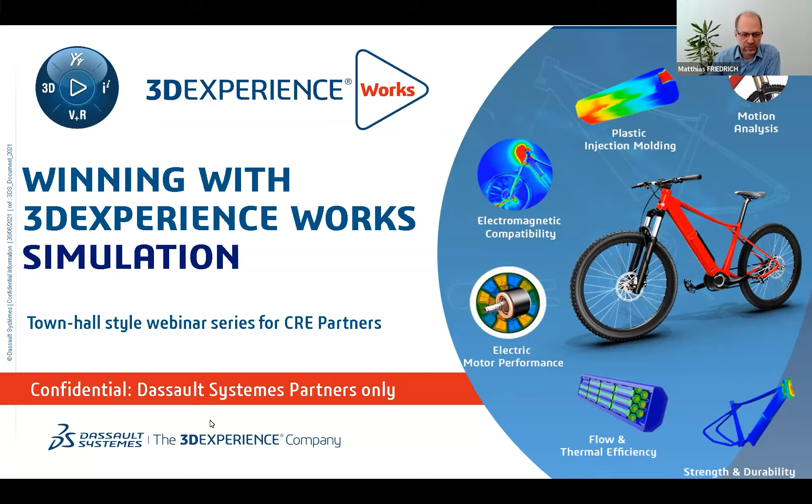This is a series where we cover all the different domains in the 3DEXPERIENCE Works Simulation portfolio. We have all the structural roles, some durability stuff, fluid dynamics, plastic injection, and today we'll focus on the EMAG role. A total of 10 sessions this year. We started in April, today we're in August, so this is our second August session. Each session takes 90 minutes.

The key benefits are you discover and learn how to close sales opportunities. It's for you to get more familiar with what we have in the 3DEXPERIENCE Works Simulation portfolio, how to position it, and how to show the benefits of these roles for our SOLIDWORKS customers. We also have hands-on sessions where you get best practices and tips and tricks delivered by our SIMULIA experts. You learn about win stories and guidance on product positioning for the different roles, so you learn how to position the EMAG role, structural roles, etc.

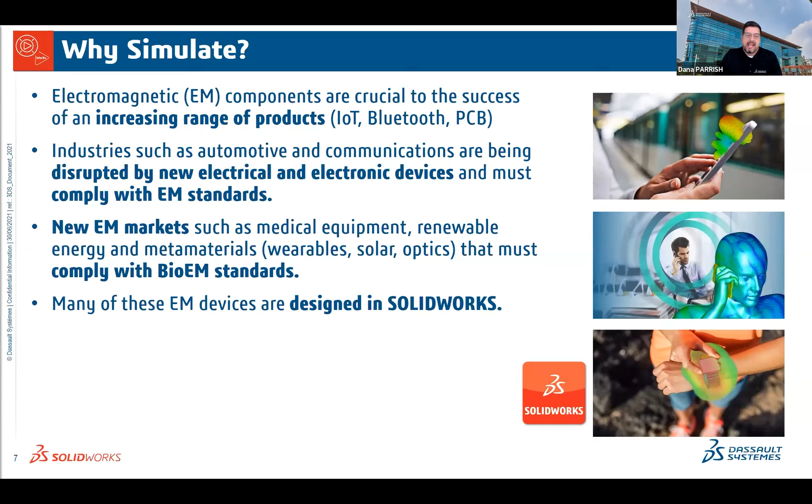Let me give you a great example of why to simulate. I don't know if you guys remember something called antenna gate. So about 2010, iPhone 4 comes out. You know, all the hoopla, right? It's an Apple product. We know every year that there's a big pomp and circumstance about it.

It didn't work. So what happened was they had to spend $175 million on replacement parts, taking the phone back, getting it fixed. It was a very bad PR move, right? Apple people are passionate about the product, and if they're passionate about it in a good way, they can be passionate about it in a bad way. $175 million that it cost Apple to fix this problem moving forward.

They didn't have any tools like that, guess what they have now? They are using electromagnetics tools, and specifically ours. Okay, why simulate here? Let's look at the actual testing.

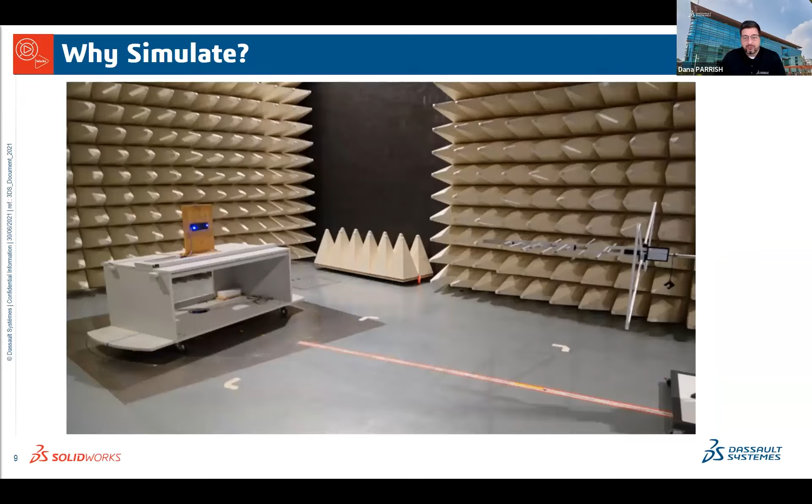This is a room where you can test electromagnetic compatibility interference. It's a very quiet room, fancy room. 50% of products that go through this lab test fail to meet the electromagnetic compatibility, or EMC, requirement. Okay, you can't launch a product unless it passes this test.

Compatibility means, where's the signal going? Are you irradiating people? Is it a nice even signal? Is it going to work?

The average test can exceed $50,000. I know that for a fact. I've talked to several of my customers that do this type of testing, and they say it can be up to $50,000. Plus, they'll put this in the room for a week, and it has to sit there for a week while it's gathering all the data.

$50,000 a test. Okay, so this is never going to go away. This type of testing will never ever go away. But gosh, if you can eliminate 3 or 4 tests, that's $200,000 you save because you're using electromagnetics to understand its performance ahead of time.

Go ahead, Peter. We have to listen, right? How do you listen to this? What are you listening for when you talk to customers?

You have to look, if they start talking about antennas or any type of electrical motors, they're doing MRI. If they're a medical company, maybe there's some sort of scanner, signals, 5G measurements, right? The anechoic chamber, I think that's what it's called, right? Emissions, PCB design. Okay, when you start hearing this stuff, that's what you need to listen for. And that's where you know that at least you can bring up the conversation of our electromagnetics tool and what it can do for the customer.

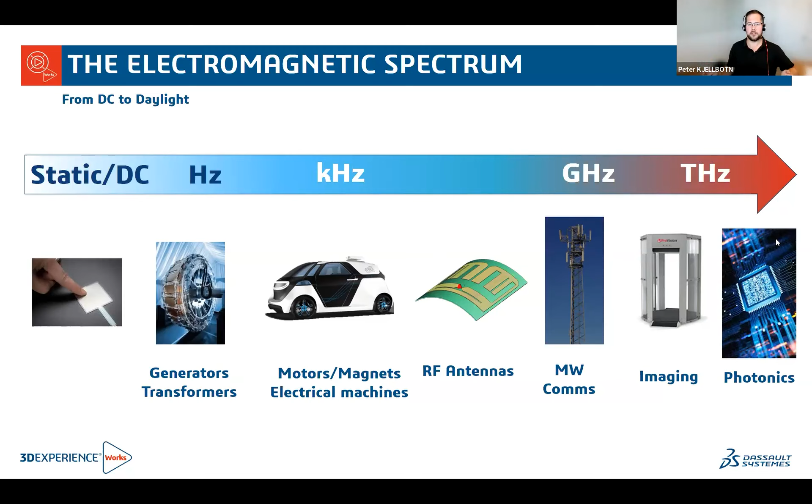So that's the spectrum we're talking about simulating, and there's obviously a huge amount of entirely different use cases in that spectrum. And that's where CST Studio Suite and Electromagnetics Engineer come in. And for those of you that aren't familiar, you'll hear me refer to both of these almost interchangeably, but we'll really talk about the difference between them.

So what Electromagnetics Engineer is, that is our offer on the platform. That's the role. And what it actually installs is CST Studio Suite. And CST Studio Suite is the actual electromagnetics engine behind the role. And what this basically does, Electromagnetics Engineer, is it will locally install a copy of CST on your computer. You launch that from the platform, similar to 3DEXPERIENCE SOLIDWORKS, where you log in, click on your compass, launch the tool.

But it's not just CST with a cloud connector on it. That is a big part of it, but there's a lot more to what the cloud offer brings, and I'm hopefully going to show you guys a little bit more about that, so you're really familiar about what CST brings to the table and what the platform tool Electromagnetics Engineer brings to the table.

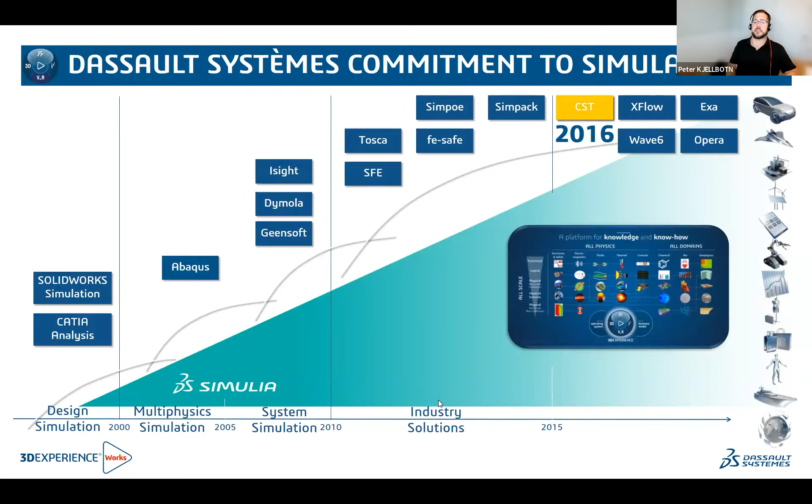So we know Dassault has picked up a lot of simulation products over the last couple of decades, part of the long-term commitment to all physics, all scale simulation, and CST was one of those. You'll see it towards the right of the slide. CST was actually acquired by Dassault in 2016, and it's since been integrated into the 3DEXPERIENCE platform, but it's not new. CST has been around for more than 20 years and is one of the industry leaders in electromagnetic simulation. So it's not a brand new product, it's a very mature, very stable product with a lot of existing users.

In electronics, that's another really big space. We'll talk about this more when we get into key industries, but anybody with a circuit board inside their design needs some sort of electromagnetics analysis, whether that is analyzing the actual communication signals, the 0 and 1 bits going through the board, or analyzing the power requirements of that board, all the power delivery networks in there, as well as running what we call signal integrity and power integrity analyses, figuring out how clean those signals are. Then we can get into emissions of those boards.

Any piece of electronics has to meet emissions regulations, and that's both for basically interference it could cause, as well as susceptibility or radiation it must accept. So that's like, if I had a cell phone and I took it and walked into my living room and suddenly my TV and my radio all went staticky and crazy, that wouldn't be acceptable. That's why every piece of electronics has to meet emissions standards.

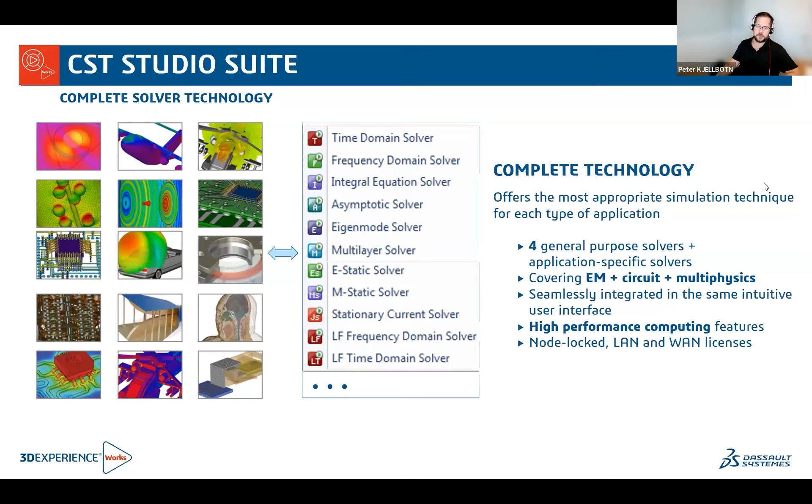Now, as an example of that, one of these would be a horn antenna, similar to a satellite antenna some of you guys may have mounted on your house or used to have mounted on your house. I may use 2 different solvers to solve this. I might use a full wave solver, like our time domain solver, to solve the actual antenna, the feed horn itself, but that wouldn't be well suited to actually solving the reflector dish, which is part of this whole system. So I might actually use a hybrid simulation where I use one solver to simulate the horn, and another solver, the integral solver in this case, to simulate the dish, and I can run these at the same time. They can trade information back and forth and run an accurate simulation.

There are also ways to do what we call equivalent near field sources, similar to transferred boundary conditions in a mechanical or fluid study. That's where we might use one of those full wave solvers to look at actual antenna performance. Then, if we're trying to put this into a much larger platform, we can imagine drawing a cube around that antenna and capturing the field it's radiating onto that cube. We can then drop that into a much larger model and use that equivalent near field source to drive the simulation on a larger structure. We'll talk more about that as we go on.

I'll actually show you an example of this type of analysis on the e-bike.

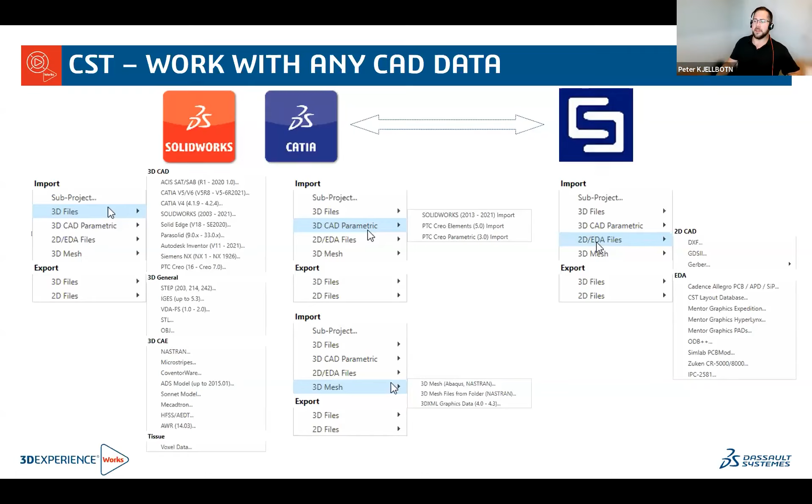You'll see on the list here, underneath the SolidWorks icon, we can handle SolidWorks, CATIA, Solid Edge, Inventor, NX, Creo, etc. We can bring in just about any mechanical CAD data. On the electrical side, we can bring in board designs from just about any standard board design software - Cadence Allegro, Altium, Mentor Graphics, Zuken, as well as the ODB++ neutral format. Regardless of what the customer has, even if they're not working with SolidWorks, we can handle the CAD data they're using. That's what CST brings to the table.

None of that is really exclusive to the platform. So what does the platform bring to the Electromagnetics Engineer? To start with, easy access to all of your CAD data - bringing it in directly from SolidWorks, storing it in a single place, a single source of truth, etc. And then all of the standard cloud benefits we're familiar with from other simulation tools.

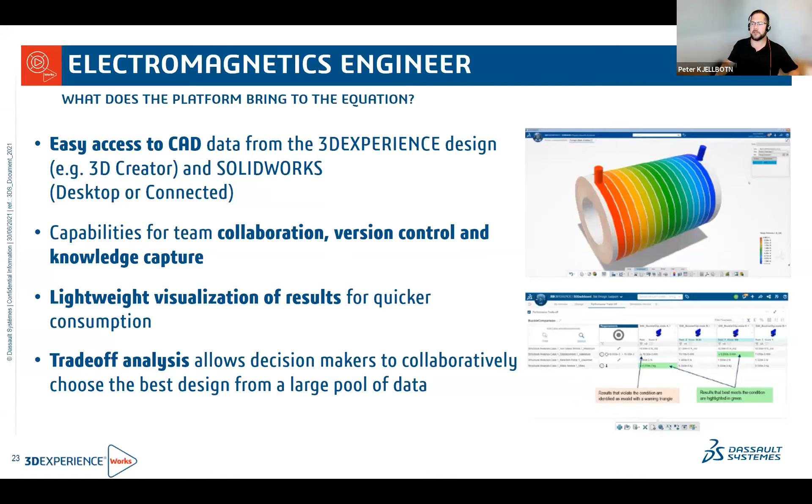We can save lightweight results to the platform. You can view those in Physics Simulation Review. We have cloud solving as well that we'll talk about in a moment. We also have the trade-off analysis app, which you'll see used in a motor video - I'll show you guys a little bit later. That's where we can go in and do multiple studies, assign KPIs and rank them, letting the platform help us look through very complex data to figure out, based on our KPIs and how important they are, what the best design decision or design choice is.

Now, for me, the most important thing the cloud brings to the table is cloud solving capability. This is common to all of the platform simulation tools, but we have some pretty compelling things that are different with Electromagnetics Engineer. To start with, we have 16 core cloud solving out of the box, which is much more than I have available on my laptop. I can solve on 16 cores all day long, no additional charge.

If I do need additional computing power above 16 cores, that's where credits and tokens come in. We have all the standard compute configurations you can get in the fluids or structures roles, up to 144 cores. But then we have some differentiators. When we get into Electromagnetics Engineer, we can run with up to 288 cores, or use coupled CPU-GPU solving. GPUs handle parallel calculations very well and are well suited to some of the electromagnetics challenges we have. Some configurations let us solve with 24 cores and 4 GPUs, or 48 cores and 8 GPUs concurrently. This can take really long simulation times and make them very manageable, or if you're exploring a very large design space, help you move through it at a reasonable speed. I have some exciting things to talk about on that.

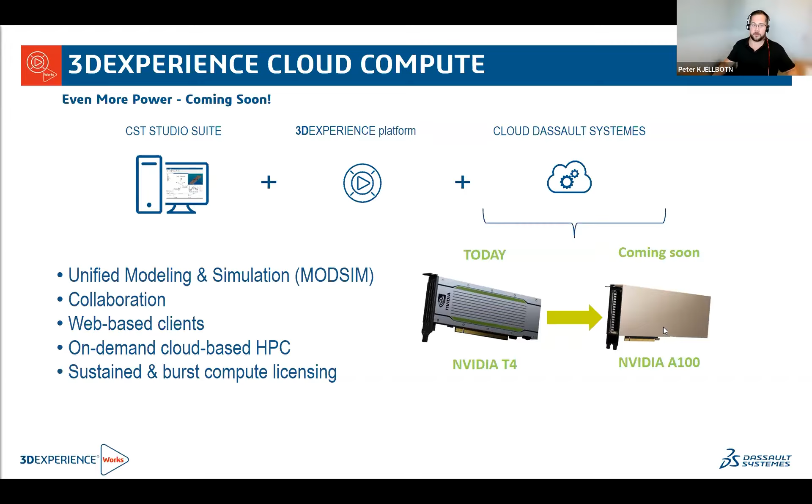What I can tell you guys, we have these brand new NVIDIA GPUs coming to the Dassault public cloud. The PO has been issued for these, so the order is in progress. Can't give you a date yet, hopefully it's this year, but we will get these in and installed. And as soon as these are in, our EMC customers are going to be able to take advantage of this. So you've seen maybe some speed up factors before where I compare these to a solve on my local laptop, and we can see like 10 times improvement when you run into GPUs.

But there's also what we call data center GPUs, and these are the newest ones. These are not designed to be put in a local workstation, they're designed to be rack mounted. And they work very, very well for performing this type of calculation. They're also used extensively in AI training as well. So let's have a look at these.

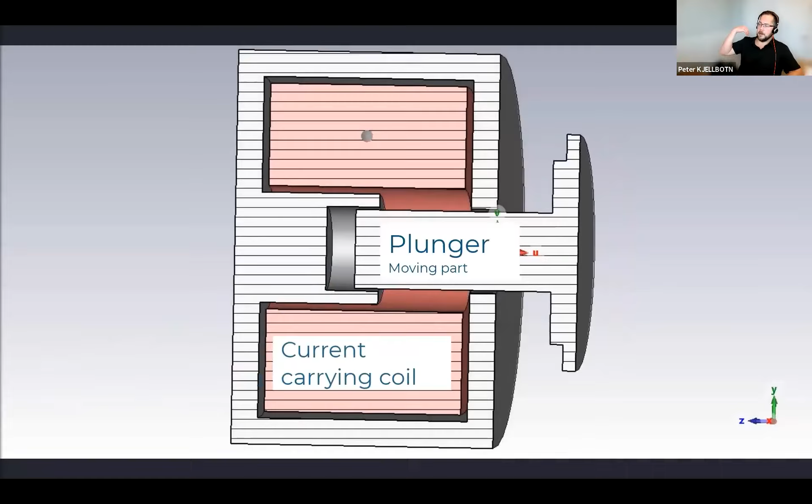Let's take a quick look at this. I've got a post on Partners Technical that runs through this, with the whole 8-minute video from Dan. This is just a highlight reel, and I'll narrate it. What we're looking at is a simple magnetic actuator here. We essentially have a plunger and a coil that's applying an electromagnetic force to move it back and forth.

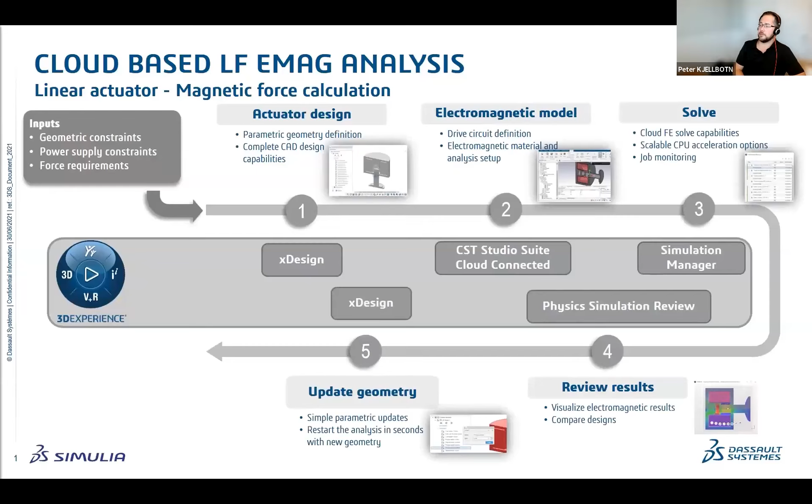What we'll do, as I mentioned, is start with XDesign for the CAD data, and do a complete parametric design there. We'll move into CST Cloud Connected to build the study, solve it with the Simulation Manager in Cloud, and then look at Physics Simulation Review to look at results. We can even go in and iterate that, doing design changes, etc.

So starting in XDesign, we can look at the entire actuator here. I've got the design, a very simple part. We basically have three parts: the housing, the coil, and the plunger. And we parameterize these so we can easily change these dimensions later on.

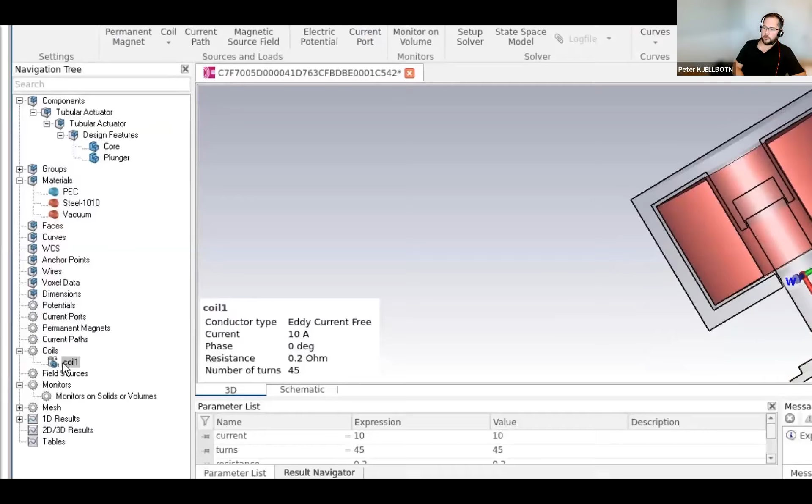Now moving into CST Studio Suite Cloud Connected, this is on a browser, we're going to open up that product and set up an entire study on it. We'll see we have the parts here, the core and the plunger, with materials assigned to all of those. We have our coil with the number of turns and the resistance defined, and we have field monitors set up as well. So from here, we've set up the study.

I can now move into Simulation Manager and actually run it. That's as simple as finding my study in Simulation Manager, clicking the Run button, and choosing which solver configuration I'd like to run with. In this case, we'll just solve this with 16 cores. It's the magnetostatic solver, so I don't believe we have any GPU acceleration there, that's why you don't see those showing.

So again, in CST Cloud Connected, we can visualize all of these results, but we don't have to load up Cloud Connected to do that. We can export those results out into Physics Simulation Review, which are lightweight versions of the results that you could very quickly show on a laptop, out at a customer shop, in a sales meeting, or even on a cell phone or tablet. So we can see the results here, and look at the forces and the magnetic field moving through the component.

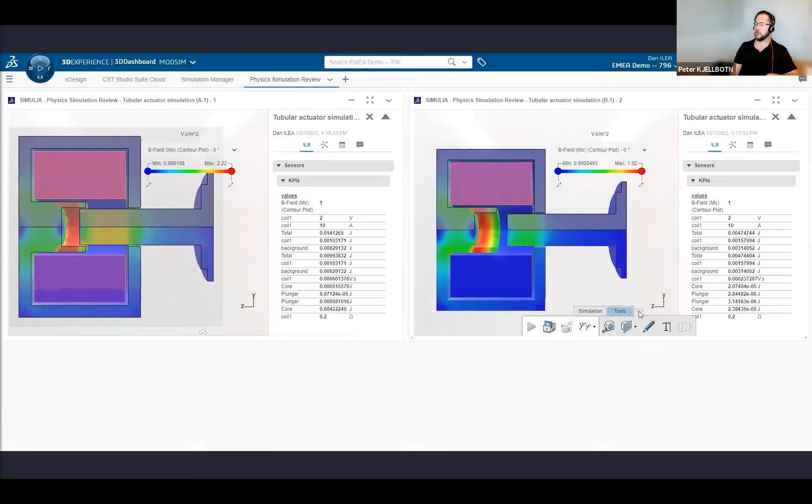And that's really an example of a workflow that went start to finish, from the concept of, hey, we want an electric actuator, right up into the full simulation of it, without ever leaving a web browser. And I think that's pretty impressive. I'm interested to see what sort of workflows our customers and our AEs start building with these, but you can do some pretty interesting things.

Now, what I'll do next is a quick session on the industry focuses for CST, and then we're going to jump into some resources that are available before I throw this over to Hassan. So without spending too much time on this, there's really three main focus areas that we have.

And I mentioned the whole big electromagnetic spectrum earlier, we can handle all of those cases. Certainly, if you see an application that's not on the screen, don't shy away from it. But if you're doing prospecting initiatives or pipeline building activity, these are where we think you're going to find the most ops. To start with, in low frequency electromagnetics, things like electric motors.

We have a really good tool set on that, I'll mention, and we'll show a video on shortly. Also things like sensor design, magnet design, and then things like the actuator design that you just saw me do.

We actually had a sale to a US customer for actuator design. This was probably a couple months ago, and the sales cycle was less than a week. We were actually dealing with an SSU op with the same customer, a structural op, and they went, oh hey, one of our electromagnetics guys wants to talk to you. And it was, hey, we need to design an actuator different than ones we've done in the past.

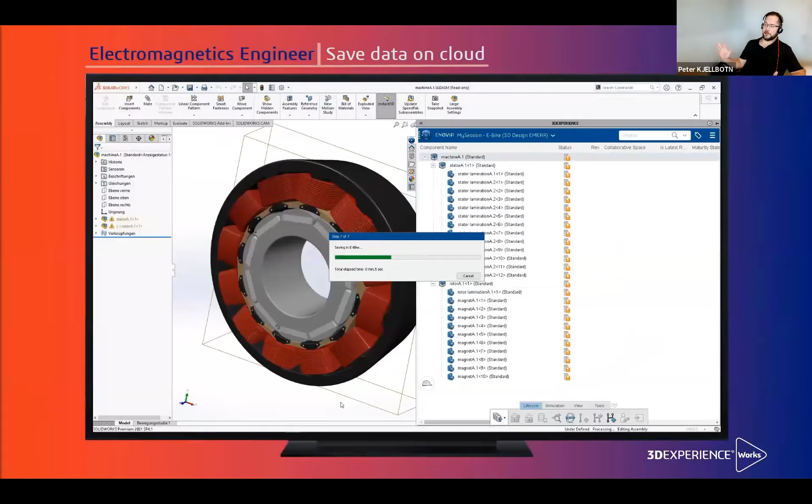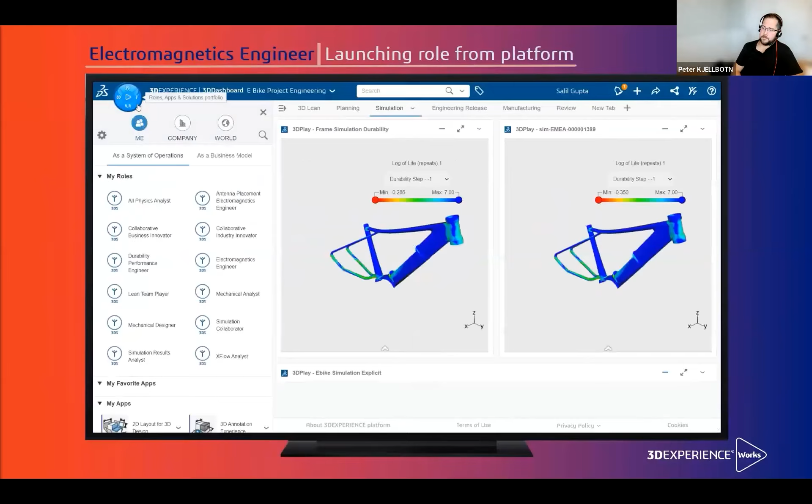Once we're here, we can bring in materials and start assigning materials for the magnets in this motor. We can define these magnets, and of course, with the power of 3D modeling here, once we have one of them defined, we can very easily pattern those around to the other ones as well.

We can go in and start defining the coil from the solid here. So I can go in, and in this case I'm parameterizing the number of turns, so I can change that or optimize that later on.

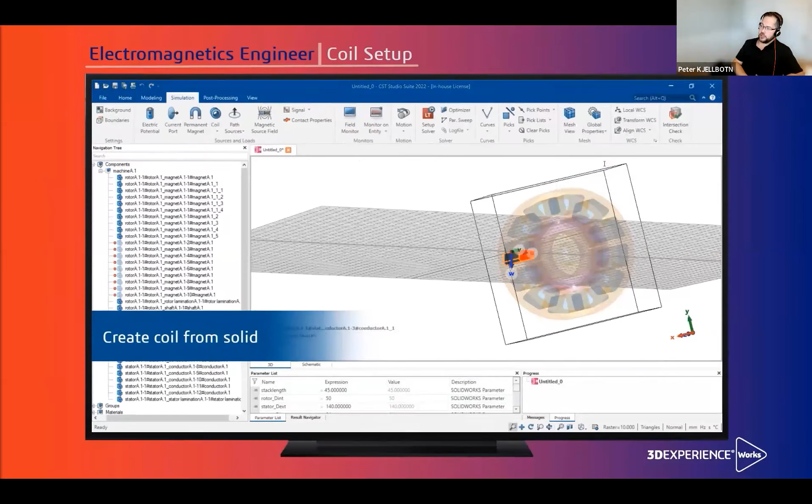In setup, this is a three-phase motor. You've got your three phases of coils there. We can define the air gap in here as well—that's the gap between the rotor and stator.

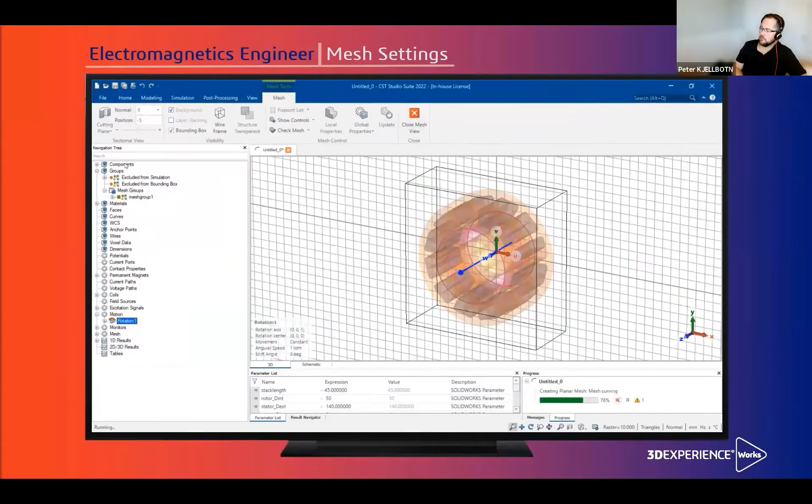Define the boundary conditions of the study, and then we can go in and mesh it. Have a look here—you'll see we're doing automatic refinement around that air gap region. You'll see a really, really fine mesh in the gap region right in there, coarser mesh otherwise, and we can now set up basically the machine task or machine simulation sequence here.

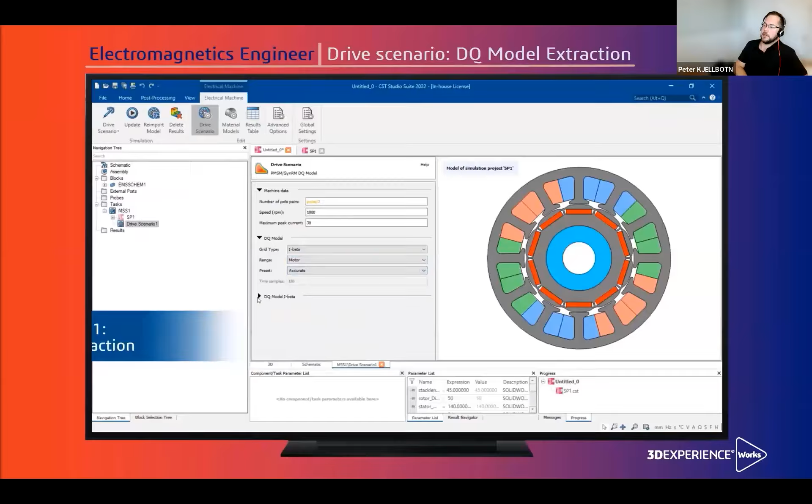We'll start defining a drive scenario, and this will pull out what we call a DQ model from this. You can see that described as a color map.

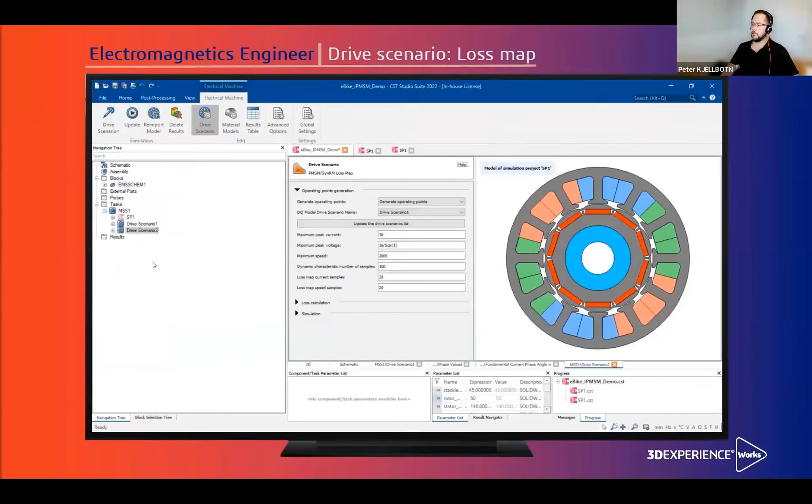Now we can start setting up dynamic characteristics for this as well. So we'll go in and define the operational limits here—maximum current, maximum voltage, maximum rotational speed on the motor—and start pulling out performance information. Things like predicted speed, efficiency curves, power curves as well.

Finally, once we set these simulations up, we can set a performance trade-off study. We're going in, we've set these three different studies here, and we're now setting and ranking KPIs.

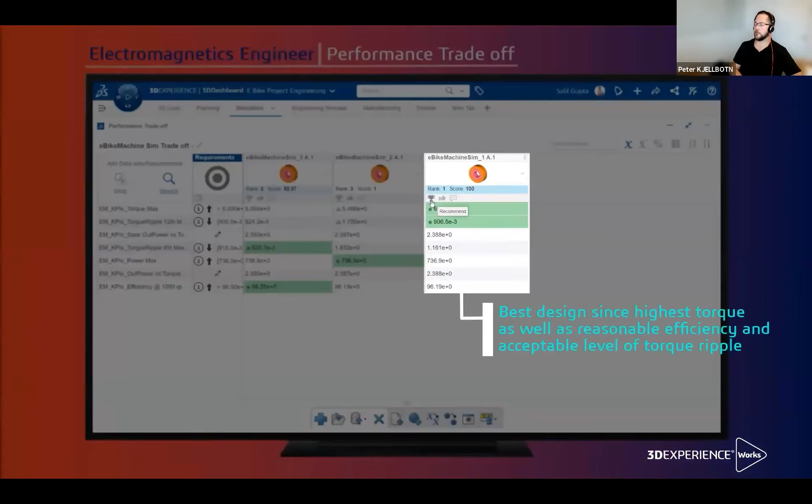Some things we might be interested in are maximum torque, the amount of torque ripple that's provided—which is how much vibration you get in the torque—as well as efficiency. So very quickly, we can go in and pick the best design based on those KPIs.

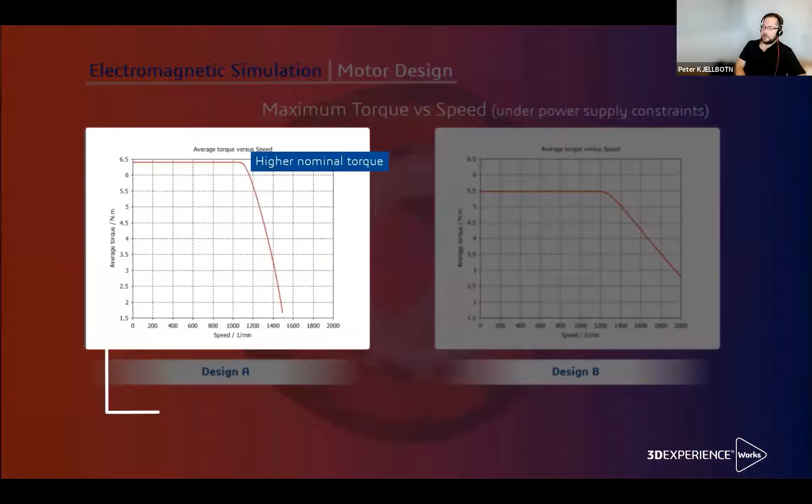So there you go—those are the three we looked at: maximum torque, torque ripple, and efficiency. Design A has a clear winner for higher nominal torque. It also has lower torque ripple, which means it will be smoother, better for the user. And finally, the efficiency is well matched to a typical riding cadence of a rider on an e-bike.

So that's a quick example of how Electromagnetics Engineer can help us look at three different designs, set those up very quickly, and pick the best one for our needs. Again, easy setup of the model and the drive scenario—you can very quickly get lots of different results out of that, and you have the power of cloud solving when you need it.

Now, with that guys, I'm going to skip over this slide on electronics just for time here. We talked about these three areas a little bit, and we're going to spend a lot more on antenna design in just a moment.

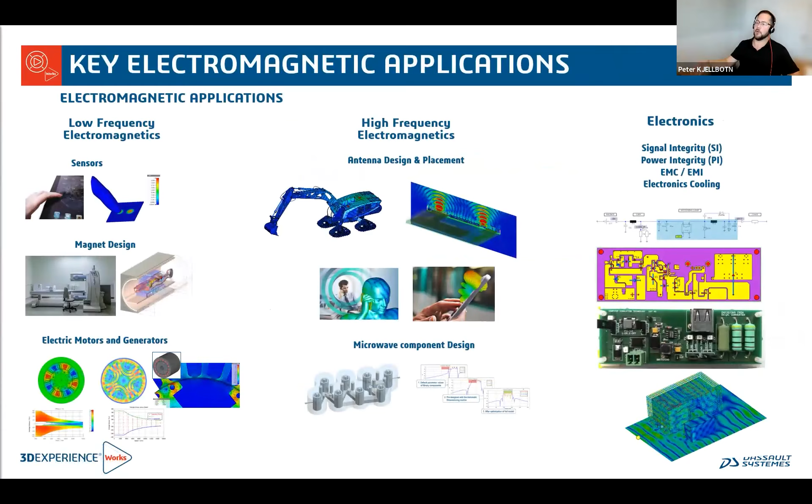Yep, we can still hear you, Peter. You're on just a roll, amazing.

Peter, you're doing great. Yeah, it's amazing just how widespread electromagnetics has gotten in the last handful of years. Everything has an antenna in it. It's wild. Well, that's like it really is.

I'm super excited about this product because it's a totally untapped market for SolidWorks. Other than a couple little partner products that didn't have a lot of capability, we haven't really played in this space before. And now we have one of the industry's best tool sets for it. So yeah, there's a lot of opportunity here, guys.

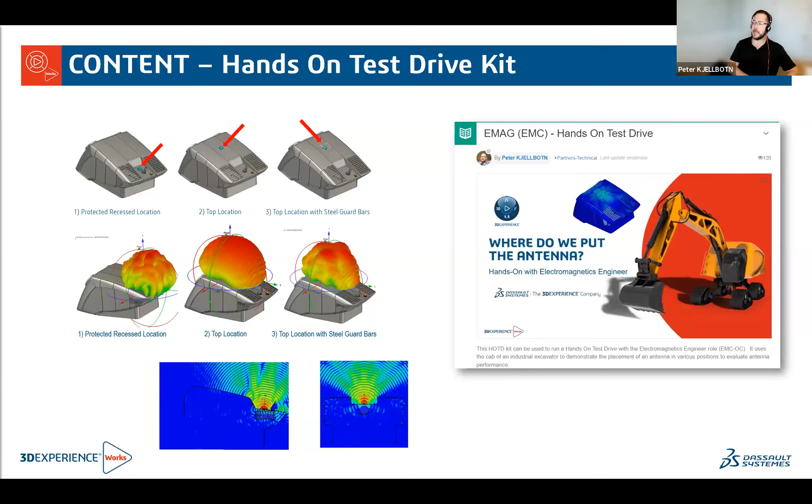So this test drive kit is a complete package that you can use to run a hands-on test drive with your customers and walk them through this exact kit. There's step-by-step guides, instructor guides, full result animations included with the data set, as well as in the instructor PowerPoint. We want to make it as easy as we can for you guys to run these test drives. And please, if you have any feedback, let me know, I'm happy to try and make this better. In fact, Hassan and I have been talking about ways we might be able to improve this and make it a little quicker to solve.

So the final thing I'll touch on here on content is tech tips. Now within the Partners Technical Wiki, if you browse from 3DEXPERIENCE Works Simulation, technical, tech tips, there's a whole EMAG section. As I mentioned, I'm really new to electromagnetics. 14 months ago I didn't know the first thing about it, and I still don't, not compared to somebody like Hassan, but I've been learning over the past year, and I've been trying to put down the stuff I've been learning in these tech tips, because if I'm hitting these challenges, probably you guys are too, as you're trying to learn this product.

So anything from tutorials on how to bring your first model into EMC, how to archive a CST project for archiving, or how to pack it up for sharing, kind of like a pack and go in SolidWorks, how to cloud solve, how to download results after cloud solving. If you solve and then try to open up on the platform, why aren't your far field plots or any of your results showing up? There's a lot of good tech tips in here, guys. And again, if there's things you'd like covered that aren't in here, that you think would be useful to have documented, please email me. I'd be happy to try and add some tips based on what you guys want.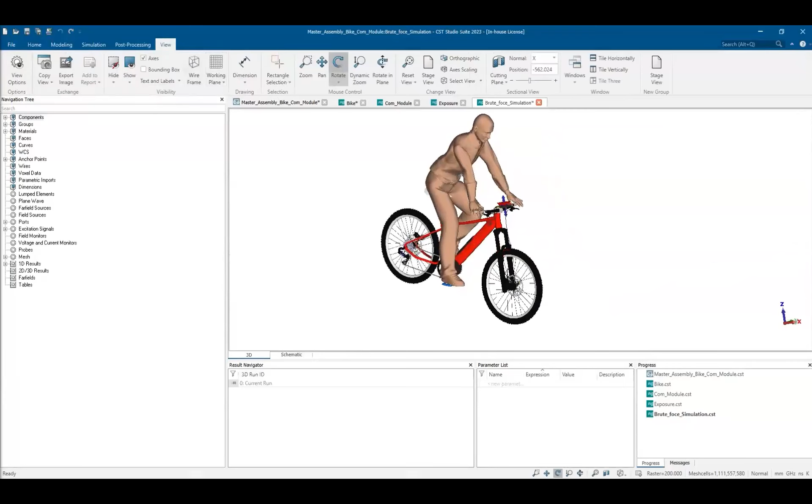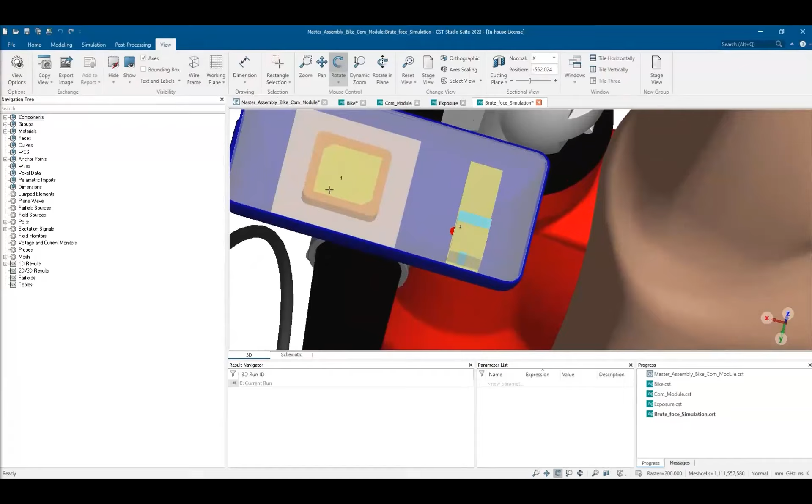You may notice that we have an electrical bike on which we have a human pedaling, and on the bike we have a communication module - a device, could be a GPS tracker or anything else. You can see we have two antennas inside: one antenna is for GPS communication, a patch with some notches - I'll tell you why we have the notches - and on the other hand we have a Bluetooth antenna, which is also found in a lot of high-tech devices.

Both antennas are based on ceramic materials, so we have a material here with high permittivity, and using material with high permittivity actually helps with reducing the sizes of the antennas.

Now, if we desire to simulate this structure to get all of it in one shot, which we call the brute force simulation, by default we have a huge amount of mesh cells - over 1 billion mesh cells. I'm not saying this is not doable, we can simulate this kind of structure, however we would need a cluster with a lot of CPUs, a lot of cores, or a workstation with a lot of GPUs inside, GPU cards with GPU memories that could handle up to 1 billion mesh cells.

Even though we could make use of our TLM solver that reduces the mesh all around the structure, we would still end up with an insane number of mesh cells needing clusters or workstations with GPUs. So my objective in this webinar is to show you how we can overcome this challenge by dividing the simulation into several sub-simulations, what we call in the domain of simulation, hybrid simulations.

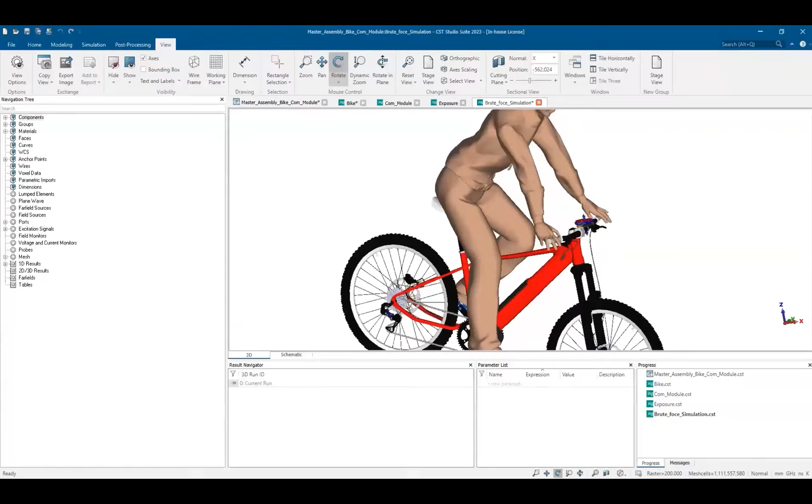Let me tell you why we have this huge number of mesh cells - we have a multi-scale problem. What we mean by multi-scale is that we have the communication module, which contains antennas with very small details, very small features, or very small dimensions with respect to the wavelength we are working on. But at the same time, we have a big scale platform like the human body we have here, or even the bike itself, considered as a huge, big domain or big platform compared to the wavelength.

In CST, we have a lot of numerical methods where each method is dedicated to one type of problem. For example, if we have antennas with small details, we may use time domain alone or frequency domain alone. Those are amazing for this kind of simulation, antennas, etc.

But when we place these antennas on a big platform, time domain or frequency domain start to be limited. For example, if I use the time domain, I can show you the mesh that we obtain - you see it's huge. We can literally not see the device until we zoom in there.

On the other hand, we do have some numerical methods mainly dedicated for big structures like the bike, which are basically surface mesh based. This is what I'm going to show you today - we call it the asymptotic solver, a ray tracing technique. I'm going to show you how we couple all the simulations together to obtain results as if we were running the simulation in one shot, as a brute force.

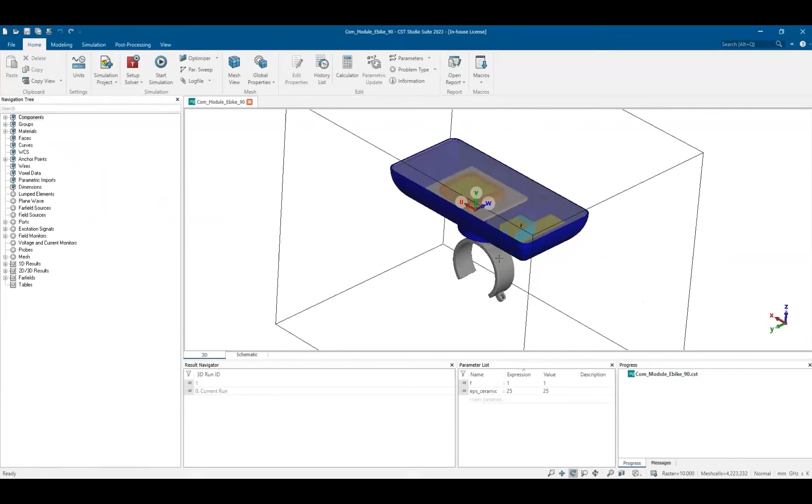But before going into that, let me open the communication module file alone to show you how the antenna operates in order to understand why we need this kind of antenna. You can see our communication module is composed of the housing, the antennas, and the hook used to fix the communication module on the bike.

So here we have the patch antenna, and you can see the patch - wait, let me just remove this glass here. So you can see that the patch is not 100% square. It is a square patch, but we have introduced some notches here.

Now why do we use this kind of patch? Because we would like to ensure a circular polarization for GPS. Why in the industry do we use circular polarization for GPS? It's only because when our satellites communicate with the GPS device - this one - the field generated from the satellites in the sky already has a circular polarization.

So in order to detect well the device or the signal on the ground, we also need devices with a circular polarization. Why do we use circular polarization? It's only to overcome the challenge of depolarization in the atmosphere. The atmosphere, especially the ionosphere, contains particles that could depolarize the antenna polarization if we use linear ones. So the solution is the usage of circular polarization.

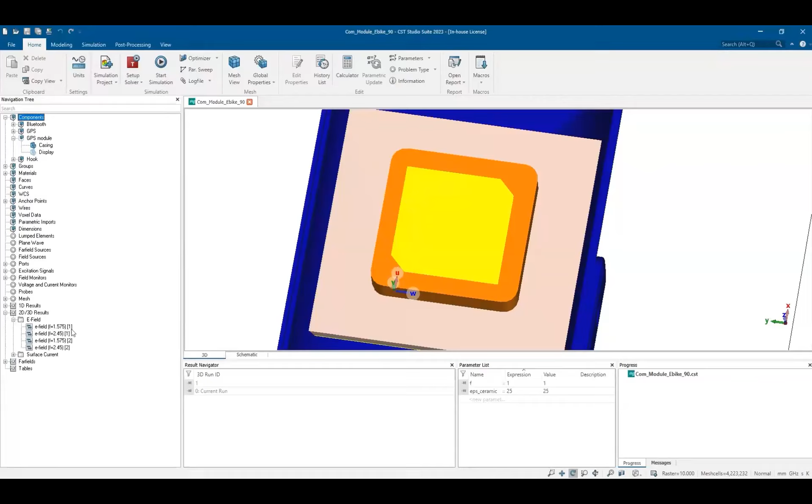Just to give you an example, if you look at the E field at the frequency of GPS - the GPS works at 1.575 gigahertz - if we take a look at the field of this GPS, I'm going to put it to contour. You may actually see that the field is rotating around the structure itself.

Even if I put a cut plane like this in the Z direction - there you go - you see that over the ground, over the device, the field generated by the GPS is rotating. And this is how we know that we have a circular polarization.

And of course, if I look at the radiation pattern, you can see that I have a perfect radiation pattern. It has no ripples, nothing. It's pointed toward the sky because this is where we are going to capture the signal.

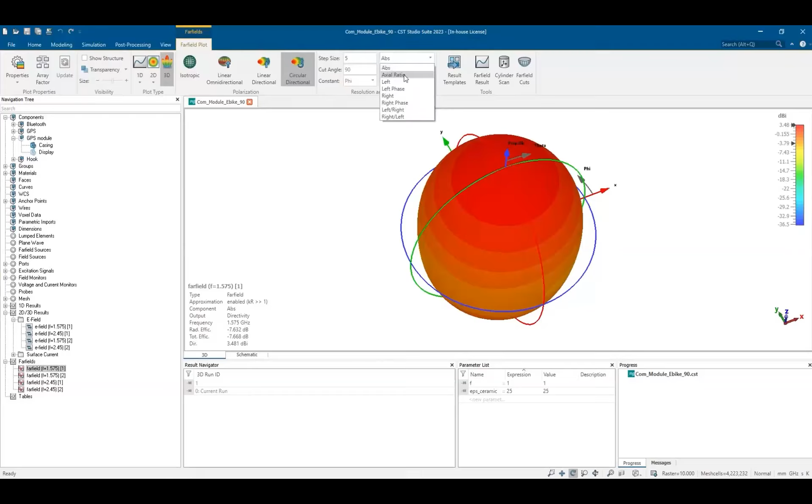But also, the GPS or circular polarization is characterized by what we call the elliptical axial ratio, and this value should be lower than 3 dBs. You can see here that in the area where we should detect the signal, the axial ratio is lower than 3 dBs - we are in the dark blue area. And of course, we can see here at 2.45 the radiation pattern of the Bluetooth, which is kind of arbitrary, and this is basically what we need for the Bluetooth.

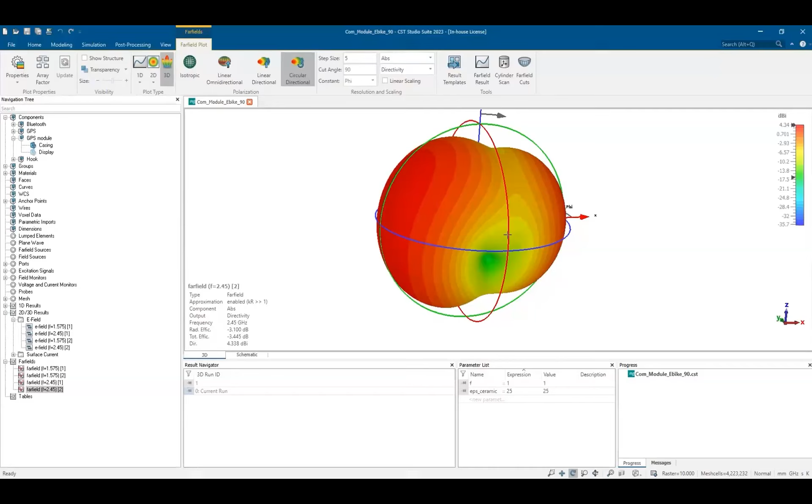We do not have a lot, and we do not need a lot of power. We do not have a perfectly shaped radiation pattern, because Bluetooth is basically a low-range application. So the radiation pattern is somehow arbitrary.

Good. Now I am going to tackle the part where I set up the simulation to run it in a hybrid way. Instead of starting a normal 3D simulation, I'm going to start with an assembly. In this assembly, I'm going to import CST files, maybe 3, 4, 5, or even 10 files, where each file represents a part of the full simulation.

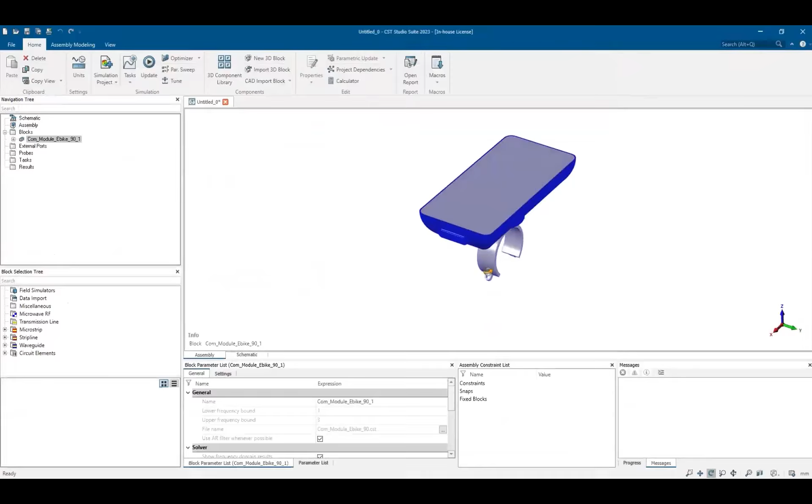Here you see I have the communication module. When I import it, I can see it like that. Then I have another file which contains the bike and the human. If I drag and drop it here, the bike will appear, and together they form the assembly. This is the device, and this is the bike and the human, and together they form the assembly I'm going to work on. So here I have 2 blocks.

Now the idea is to create the hybrid solver and tell CST which block is going to be simulated with which numerical methods. To do this, we go to simulation project once we have imported the files. I'm going to save this and call it master assembly. Once the project is saved, we can start defining the hybrid simulation, where we attribute a numerical method to each subdomain.

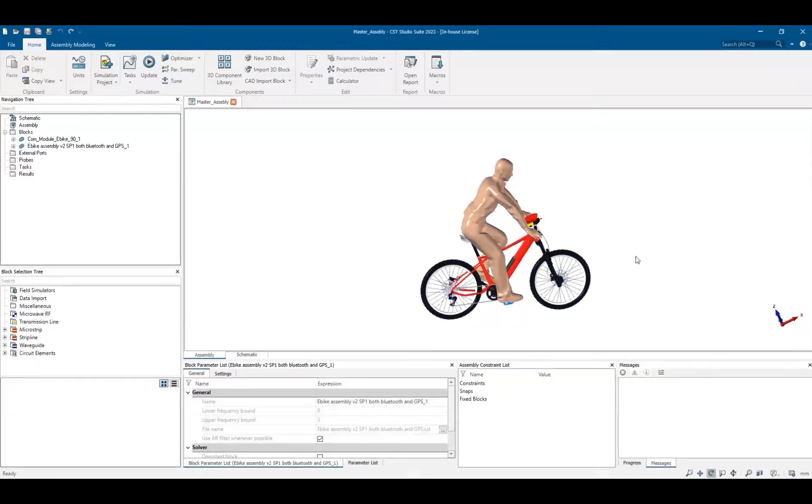I'm going to wait a little bit until it saves, and then show you how to do this. Now it's good. So to define the numerical method, all I have to do is go to simulation project, hybrid solver task, and choose unidirectional. I'll explain what unidirectional and bidirectional mean, the difference. But here, let's follow the messages.

First I have to define the simulation project for the platform. So I'm going to select the block which is the platform, in my case the bike and the human. Either I double click here or select it here, and tell CST that I'd like to simulate it as a 3D model like this. Then I create the simulation project.

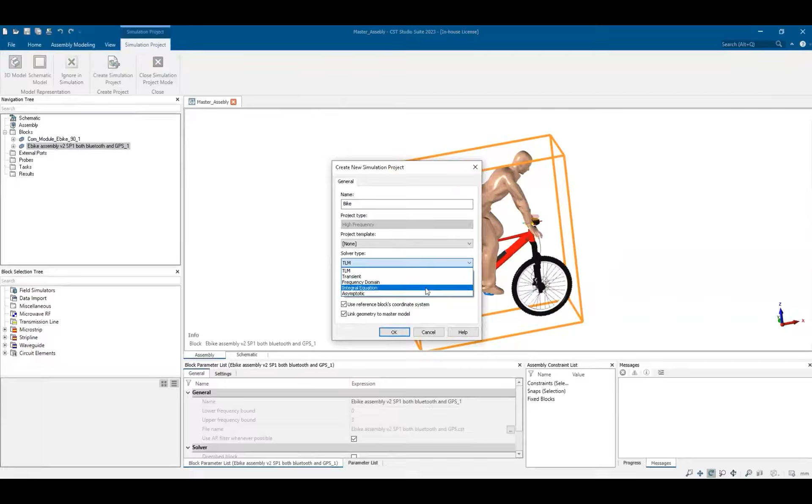Here I can give a name, bike, and define any type of simulation. As I told you, for the bike and the human we will use the asymptotic solver, which is great for antenna placement on big platforms, and it's ray-based. So I click OK.

Now we start defining the sources. I only have one source here, source number 1, which is the communication module, even though it has 2 antennas inside, it's considered one source with 2 ports. Again I say I'd like to simulate this as a 3D model, create simulation project. For this file I'm going to call it com module, and use the TLM solver, which is a time domain solver, then click OK.

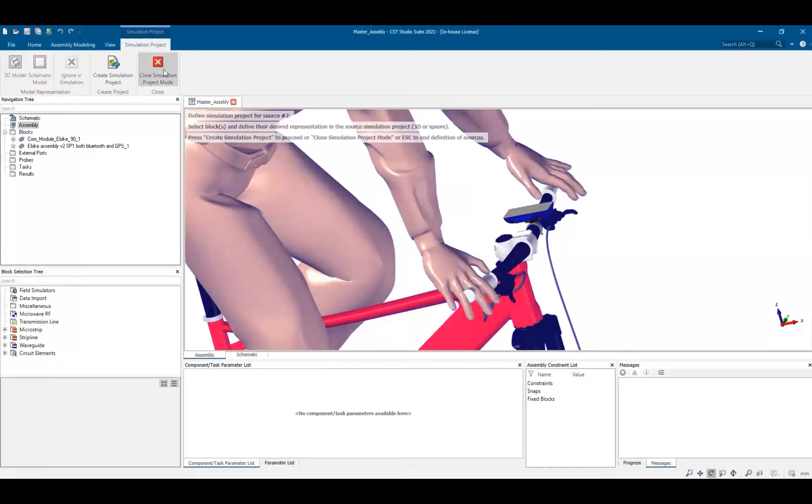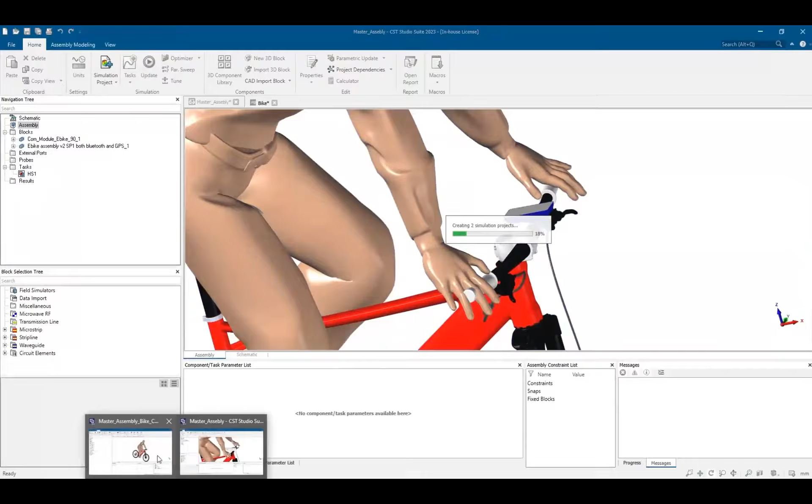Do I have another source? No. So all I have to do now is close the simulation project. We can see here that we start by defining HS1, which is hybrid solver 1. This is going to take some seconds, maybe some minutes to finish, depending on the size of the platform. But I have another file here that's ready to show you what we obtain.

So here I have the assembly I showed you, and here is this hybrid solver. Inside this hybrid solver, you see how it goes, with boxes here, which I'll explain. Under this HS1 task I have the simulation for the communication module and the simulation for the bike. If I go to the communication module, I'm seeing the antenna device with a part of the bike, which is completely normal.

And here we have the simulation of the bike that is here. Now, how does this hybrid solver work?

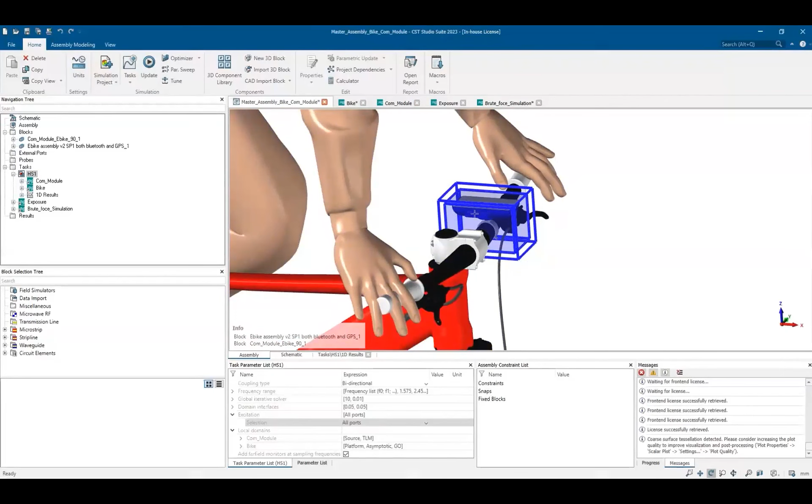First of all, we have the unidirectional and the bidirectional. The unidirectional means that I will simulate the device, record the field generated by this device on this small box, and then place this box as a source in the platform simulation. Then I can obtain everything, and that's one direction, right? So because I went from the box to the platform, and that's it.

However, sometimes when you place your antenna here on a bike or something, the field that is generated on the platform could be reflected back to the antenna. And this could modify the properties of the antenna, and this is where the bidirectional solver is mandatory.

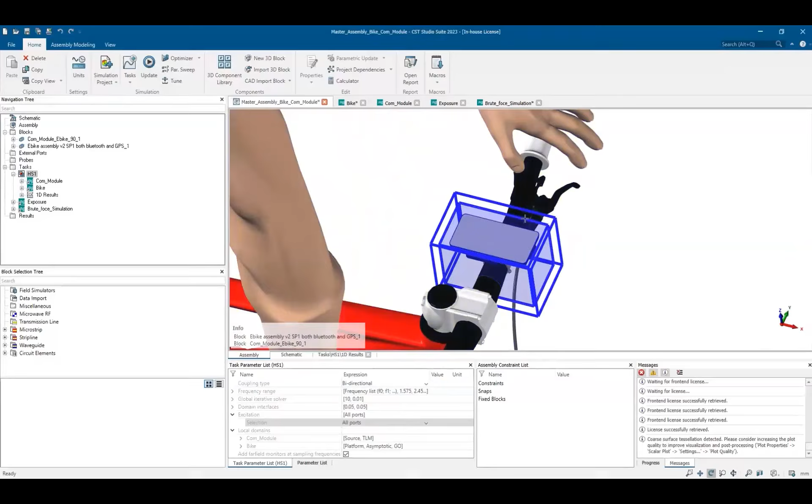You can see here that since I've used the bidirectional coupling for this task, I have two boxes. The first box corresponds to the antenna, so I simulate the antenna. I record the field generated by this antenna on the smaller box. Then I take this box and consider it as a source for the platform simulation.

I run the platform simulation, and then you see here that I have another box, the bigger one. On this box, I'm going to record the field that is coming back from that platform to the region of the antenna. Then this big box, I'm going to put it inside the antenna simulation, and resimulate the antenna while considering that I have incoming field from outside.

And all of that, we call it one iteration. Of course, we need as many iterations as we can in order to obtain a certain convergence, because we run one iteration and then a second iteration, and we compare the error between each iteration.

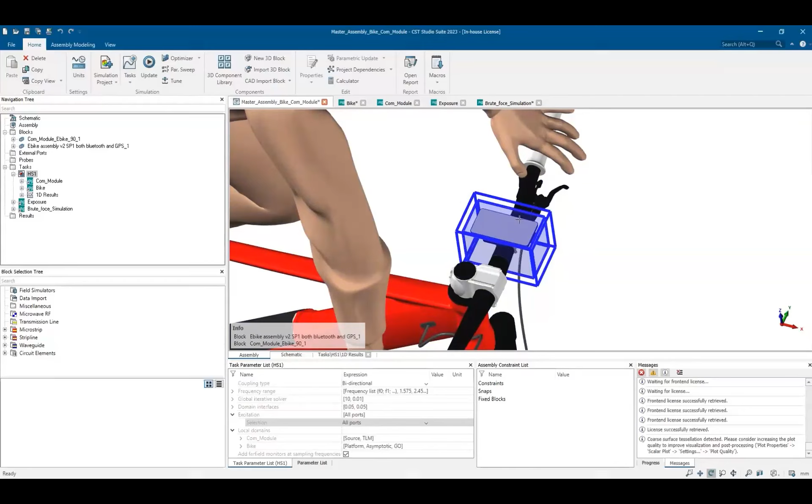And this error, if it's below — look here, we have a global iterative solver — if this error is below 0.01, which means 1%, we stop the simulation. If not, we run a third iteration.

Of course, all of that is done automatically. A third iteration is run, and then we compare the results of the third iteration with the second one. If the error is lower than 1%, we stop.

Otherwise, we continue. So now if we reach 10 iterations and we still do not have the 1% error, the simulation will still stop. So sometimes you can increase this number to 20, 30, anyway.

But in all the projects that I've worked on, even if we have a lot of interactions between the antenna and the platform itself, we do not go beyond like 7 or 6 iterations, honestly. So the more iterations, the more interactions between the antenna and the platform.

Now, of course, here for the frequency range, I chose to run simulation only at the frequencies of GPS 1.575 and Bluetooth 2.45. And here you can see again that I have the source that needs to be simulated with the TLM solver, and the bike, which is the platform, I will run with the asymptotic solver.

So you have the geometrical optics, physical optics, whatever you want. And of course, here you can choose whether it's unidirectional or bidirectional.

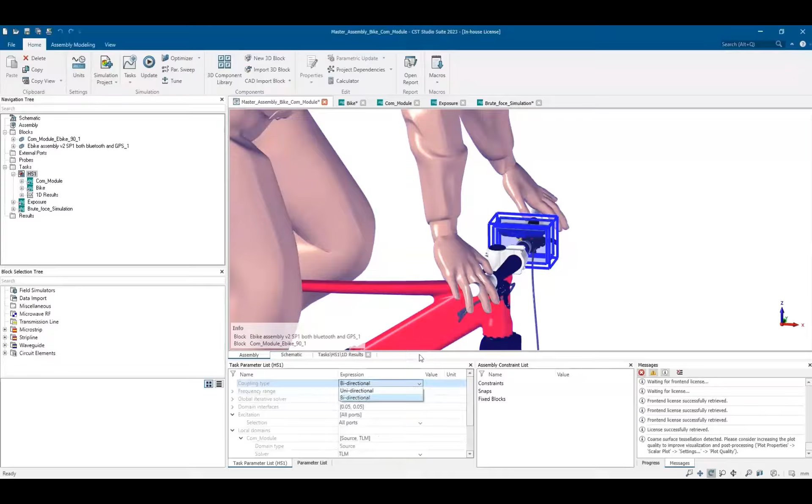Now let's go here to the communication module file and see what happens. So you see here I have the antenna, but again, I do have a part of the bike — a small part of the bike, the handle. You have here the cable, the brake cable. You see what I mean? So why do we include a part of the bike in this simulation?

Well, because we do not want to violate the continuity principle. I cannot just simulate the antenna alone in free space, record its radiated field, and then use this radiated field as a source in the asymptotic solver. I need to take the antenna and the part of its environment.

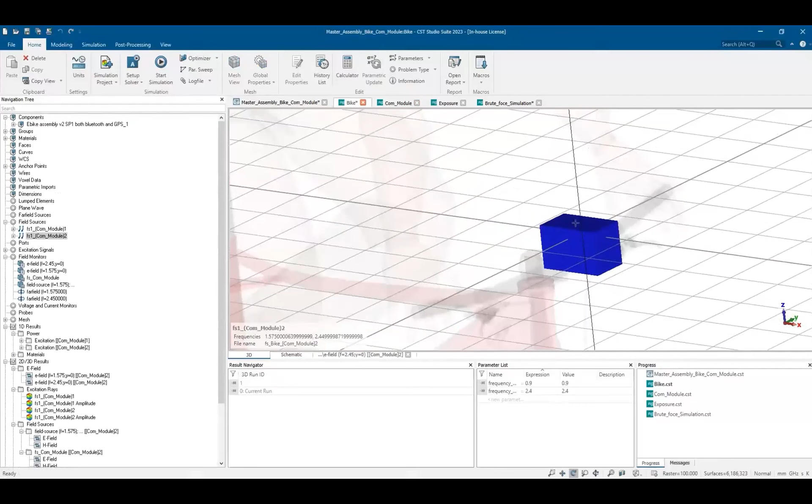So you see, it's really a small part, so it wouldn't change anything regarding the mesh. And then in the bike file, you see here that I have the platform with the bike, and I do have here a small box, which basically represents the radiated field by the antenna, which will be re-radiated on the platform.

And again here, if I come back to the communication module alone, I do have here field sources that I'm going to show. This source actually is nothing but the field that is recorded back and reflected back to the antenna. So we see everything is done automatically. Now let's see the results.

So first of all, let's see the results. Here we have convergence curves. Of course, convergence curve, we should have as much as excitation, because I have two ports, port 1 and port 2, and also for each antenna I'm running two frequencies. So you see for each excitation, I have this curve.

So you see here, this is a first hint that there's no much interaction between the GPS module or the communication module and the bike itself, because we only needed 3 iterations in order to have an error which is much, much lower than 0.01. You see here I have an error after 3 iterations, which is 1.5 per thousand. Very low, and that's great.

So let's see for the other one. Same stuff. After 3 iterations, we converge to an error which is lower than 0, about 5 per 10,000. So that's really, really small. Good.

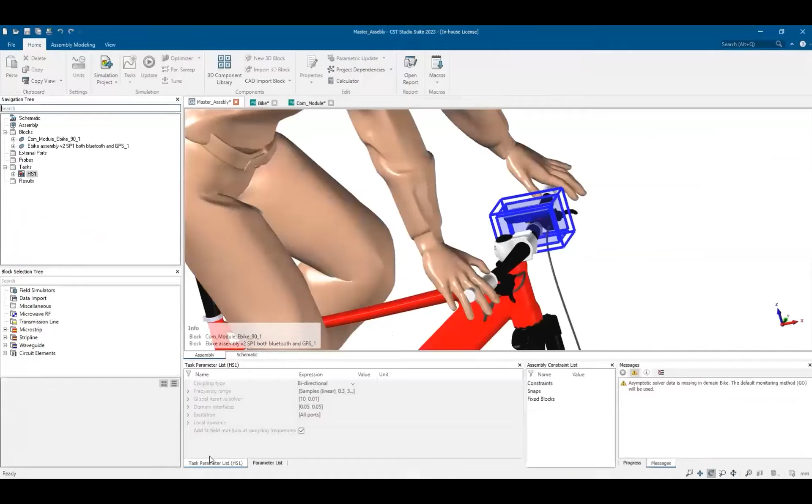So this means that even the matching of the antenna, because now if I show you the simulation here of the communication module, I think I closed the file, but that's not a problem. I'm going to just show you the return loss on each antenna.

So you see here, if I look at the S11, you see the antenna is perfectly matched for the GPS. If I put here 1.575 gigahertz, you see I have a return loss which is lower than minus 20 dB, which is amazing. It means that my antenna will receive quasi perfectly the signal that is sent from the satellite.

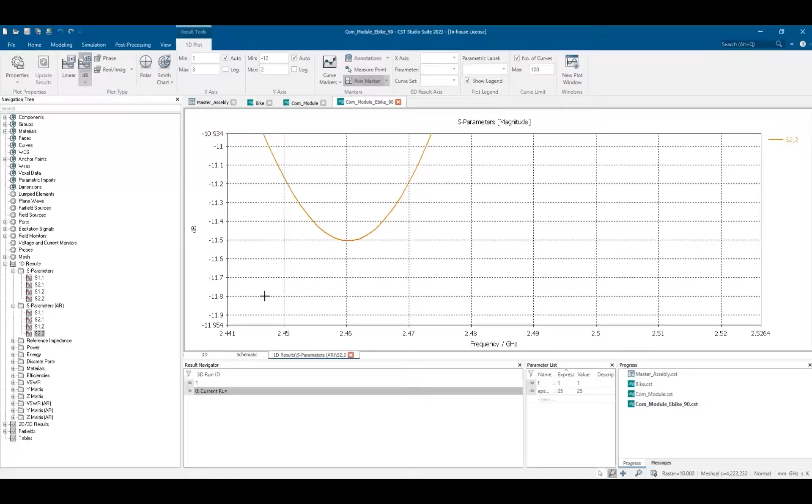And let's see for the Bluetooth antenna, you see we are at 2.45, and again we do have a quite nice matching, lower than minus 10 dBs or minus 11 even. Usually for the Bluetooth antenna, since we are in a low range application, we do not have a lot of matching requirement. This is why sometimes the specification for Bluetooth matching is not even minus 10, but sometimes we fix it to minus 6. And you see here at 2.45, we are at minus 11, so that's really below minus 6 dB, so we are perfect.

So even though the bidirectional coupling will recalculate the S parameters at the frequencies of interest, to see if putting the antennas on the bike will mismatch or influence them.

So let's see. If I go here to the S parameters and I see the S11, as I told you, it's calculated at 1.575 and 2.45. But for port number 1, I only care about the GPS signal. You see here, we are around minus 16 dBs. For the antenna alone, we were at minus 21, but here we are at minus 16. That means that even though we have low interactions, those interactions were enough in order to degrade a little bit the matching. But we are still below minus 10 dBs, which is something good for reception.

At the same time, let's see the Bluetooth antenna, the S22, and of course the frequency that we care about is 2.45, and you see here we are roughly at minus 12.5. So sometimes if you put antennas on big ground planes or big platforms, the matching could be improved somehow. Here we can say that the matching didn't change a lot, so that means the bike, the platform, has more influence on the GPS antenna than it has on the Bluetooth antenna.

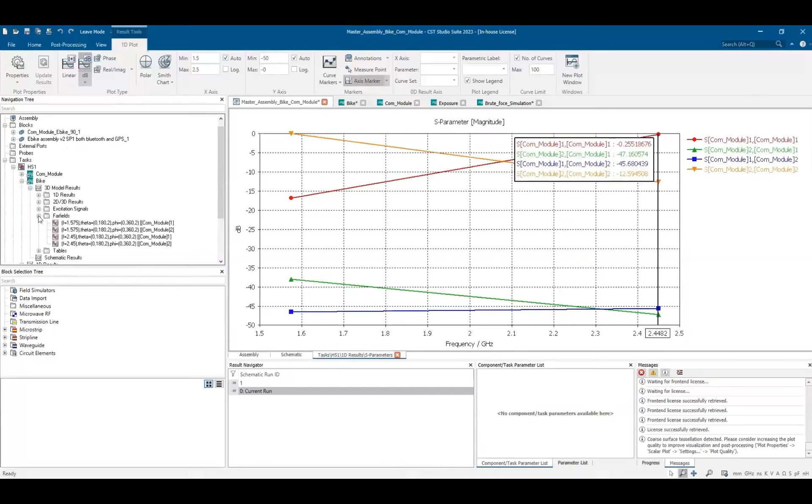Now, of course, we can have a look at the radiation patterns, which we can find here in the bike simulation. So you see here we have the far field. If I look at far field at 1.575 for number 1, which is the GPS antenna, there you go.

So first of all, we may notice here that the radiation pattern has some ripples, which is totally normal, because when we place a small antenna on a big platform, you have some surface current that will flow on the platform, and those surface currents will still be radiated. Even though they are very small or very low in amplitude, they will radiate, and they will be summed up with the radiation of the original antenna. This is why sometimes it sums up, sometimes it's a difference. This is the reason why we have the ripple in here.

But we do have a gain of around 3.4 dBs, and especially let's see the axial ratio to see if we still have the circular polarization, right?

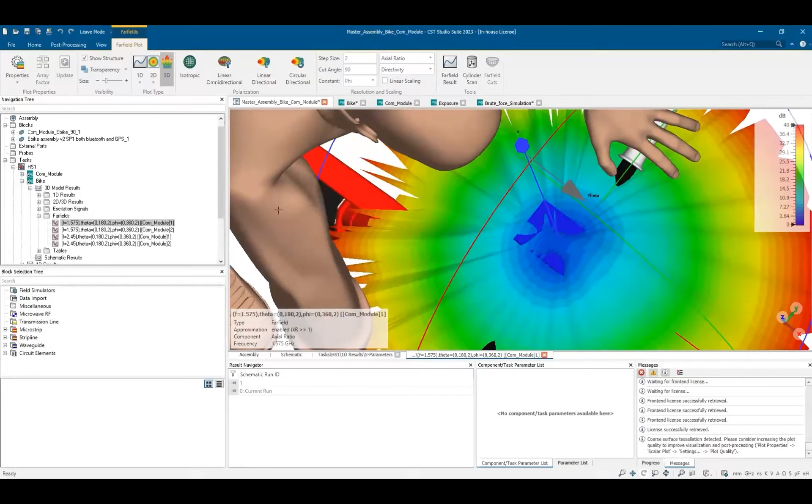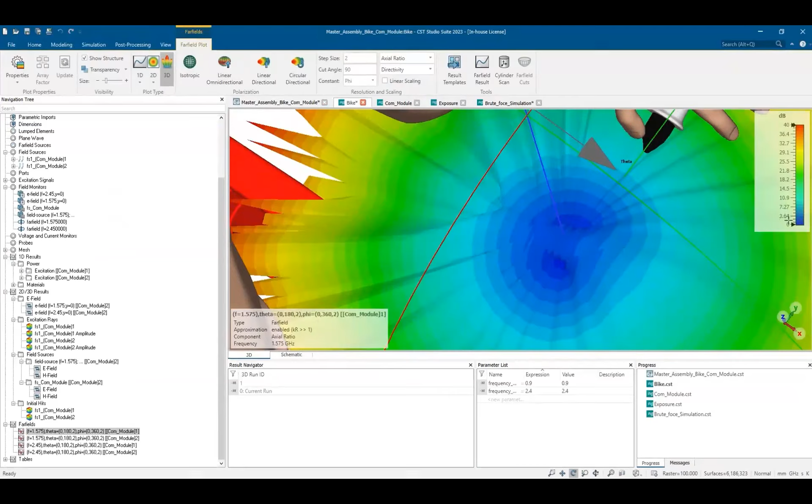Let me hide these field sources to see the radiation pattern better. You can see there's a small degradation on this plane of the axial ratio, going up to around 4 dB, but on the other plane we still have areas much lower than 3 dB. So we could still assume we have circular polarization.

Another option is to look at the theta or right and left components. If I go to the left component, I have a very low value. We don't care about what's happening downwards, only what's pointing towards the sky. The left polarization is low, around -11 dB, but if I choose the right polarization, now I have the good radiation pattern. So our antenna is right-hand circularly polarized because the right circular polarization is dominant.

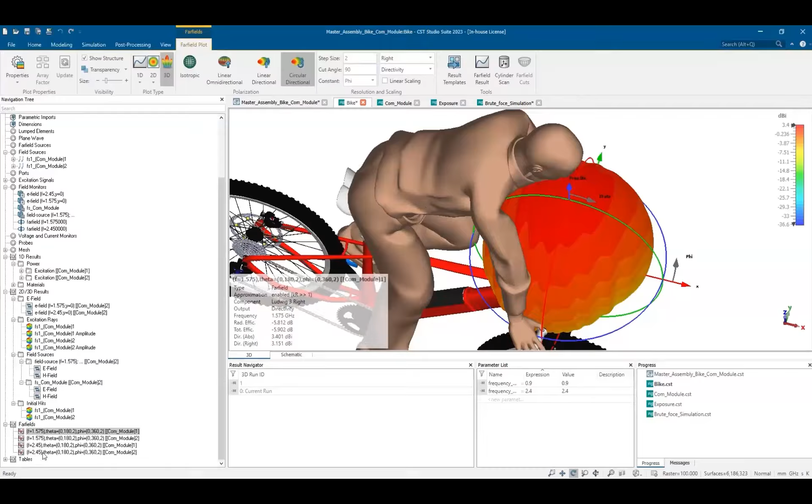Now if I go to port number 2 at 2.45 to see the performance of the Bluetooth antenna, let me put the ABS here. We're still going to see some ripples, even more ripples, because the bike has more influence on higher frequencies. This is why we see more ripple, but the radiation pattern still resembles a bit what we had before.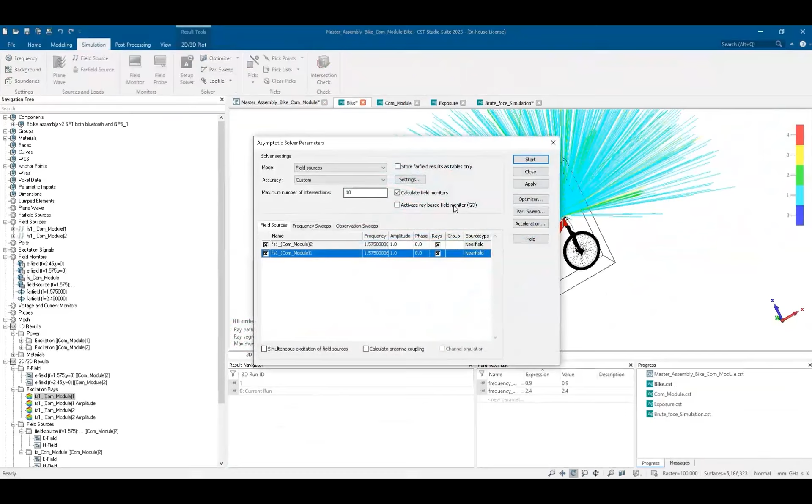You see all of those, you have the incident rays, which are order 0. That means these are the rays that go out from the radiation field box that I imported. Then you have the others with the order of intersection. Even though I ran my simulation with 10 interactions, taking into consideration 10 intersections, you can see here I only have up to 4 intersections. By intersection we mean when a ray hits the platform.

You can filter them. For example, I just want to see the rays with 4 intersections. If I go to properties, I can set the limit to between 4 and 4, meaning 4 interactions. If I click OK, we see the geometries on the bike, or solids, causing 4 intersections are mainly on the handle of the bike. We have an incident ray, it hits this part, goes back, goes again, then goes out with the red part - the last interaction is the 4th, color-coded red.

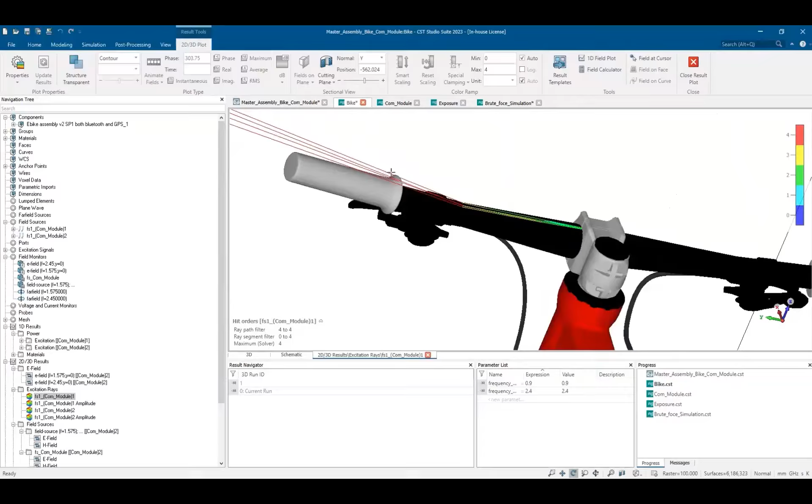In addition, we also have the radiation pattern at 1.575. I can animate it, so you see on the bike how the field is propagating. You see the GPS doesn't have a lot of interaction with the position of the human here, and even though this is a GPS antenna, it will not radiate, because it will only receive signal from the satellites.

If I look at the radiation pattern caused by the Bluetooth antenna, this is because the Bluetooth antenna could be communicating with the user's mobile phone, connecting a headset or smart glasses, whatever you want. So at some moments this Bluetooth antenna will radiate, and you can see here that it's definitely radiating towards the human body.

Now the last part of my video is about human safety on the bike. We all know that nowadays, whenever you certify a high-tech device, you need to make sure that the field radiated toward human bodies around this device will not be absorbed in large amounts of power.

And these power limitations, they are set by international standards. For example, in Europe, we have the ICNIRP. And it gives us some limitations about the absorption of the human body of the field or the power.

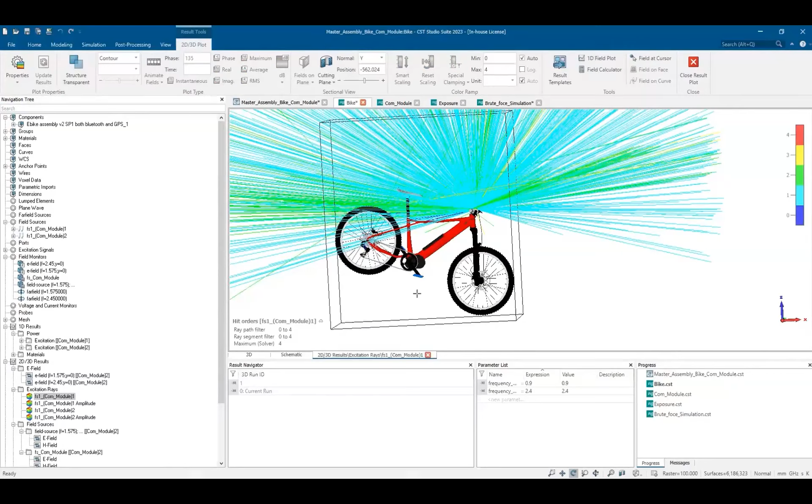Now, the numerical methods here that I used, which is the asymptotic solver, the ray tracing technique, it's not quite accurate for this kind of evaluation. I cannot use it to simulate what the body is absorbing. For this, we need a more appropriate solver, and of course, one of the best solvers is the time domain. But here I'm not using the time domain.

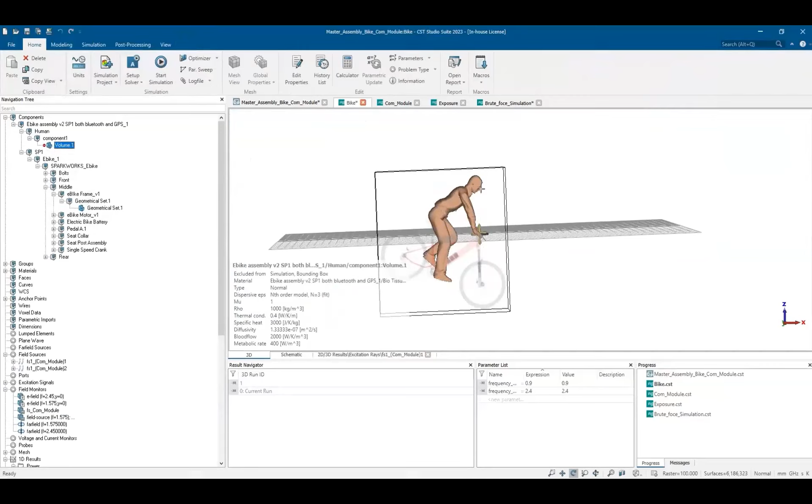So how shall we do this? Again, look what I did. You can put a human only as a reference. You see here, my human is completely excluded, only visually here, but excluded from the simulation. But I've used this human just as a reference to define this box here.

I defined a box only around the upper body of the human, because the field that is radiated by the Bluetooth antenna will be recorded on this box, and then in another simulation, I'm going to import the human, and use this box as a source. So you see how much we have divided the simulation, breaking it up into several sub-simulations.

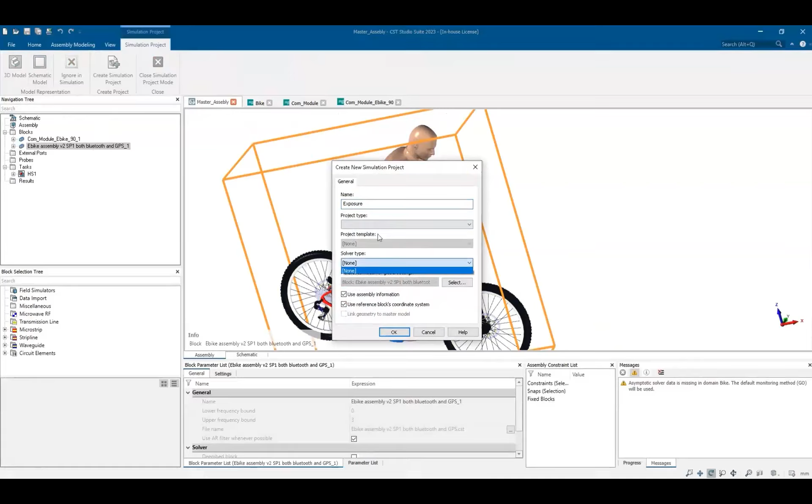So there we go. Now, to run the simulation, if I go back to the example where I'm running the demo, all I have to do is tell it I don't want a hybrid solver now, it's only the platform as a 3D model, and run it. I'll call this file exposure. And the solver, yes, it's high frequency, and the solver is TLM.

Okay, now while it's being created, I'm going to show you what happens here. I have here the exposure, you see the human, and I have this source on which I have recorded the field. Let me just give it 1 second so the fields are loaded.

So basically we can see it here on the bike, the field source of the bike. This field is recorded on the box, and this field here we can even draw as a maximum. This field will be re-radiated to the inside where the human body is shown. You see, this is it.

And now if I can see the field, of course not at 1.575 because the GPS, as I told you, will not radiate, it will only receive. So probably it would be better to see what is happening at 2.45, which is the Bluetooth simulation.

So I'm going to just wait for a little bit before this shows. There we go.

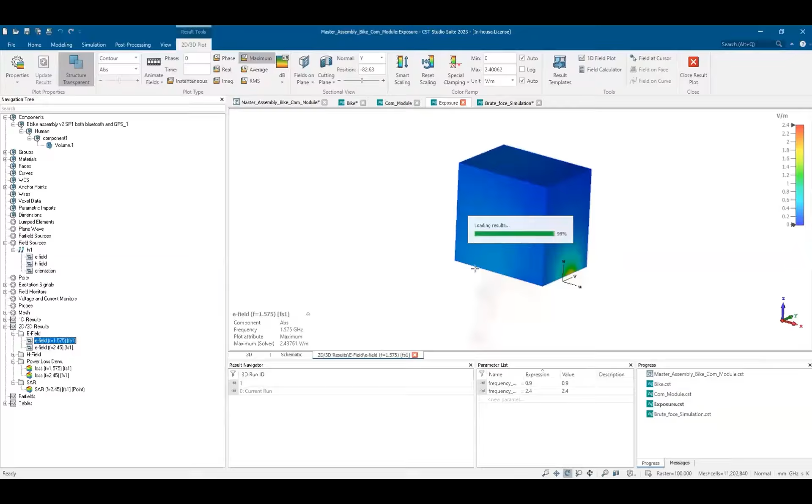Yeah, of course we do have a lot of, you see here, for the human body alone I have 11 million mesh cells. And I've set the mesh to have mesh cells with a size of 5 by 5 by 5 millimeters inside. But sometimes you have standards that require 2 by 2 by 2, so the choice is yours. You can refine or not refine the mesh accordingly.

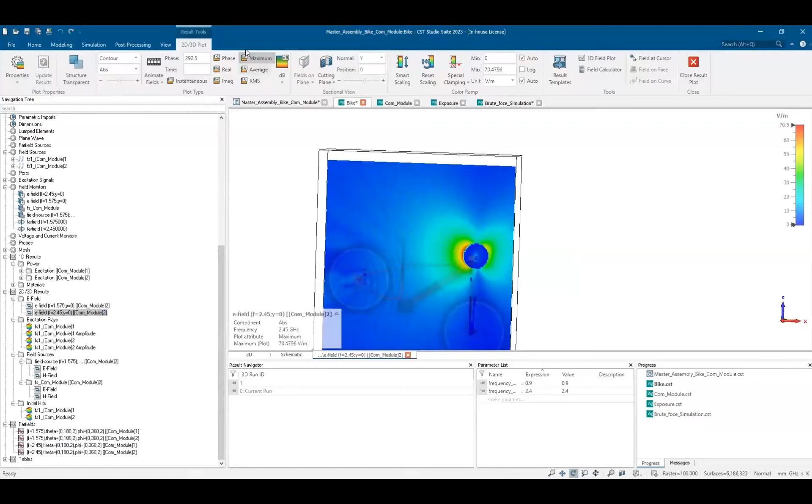So let me draw here the E field that is radiated on the human body at 2.45. There we go, I'm going to displace the human body. Okay, you see, this is the field radiated from the Bluetooth antenna on the human body. So basically it's mainly here, and if you remember how the Bluetooth is radiating, the maximum of radiation is going toward the hips of the human body, right?

So this is why if I go here to exposure, we can definitely see that most of the field is going here. You can go here to see how the field is radiated inside. Basically the field doesn't penetrate a lot because we are at a relatively high frequency, which is 2.45 gigahertz for the Bluetooth. And with the conductivity of the tissues of the human body, we are like a mirror, you see.

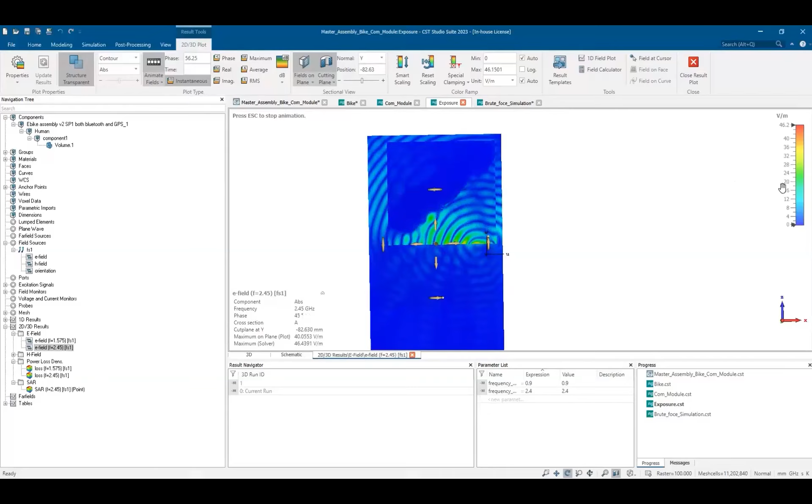If I increase the dynamic here, we can still see that some of the field penetrates the human body. It's really interesting to see. So now we do not only observe the field, but we can also observe the density, the power.

I can see here the losses. Basically, those losses are nothing but the amount of power that is dissipating. Once again, we can see that the maximum power is dissipated at the region of the hip, even the left one more than the right one, because it's closer to the antenna.

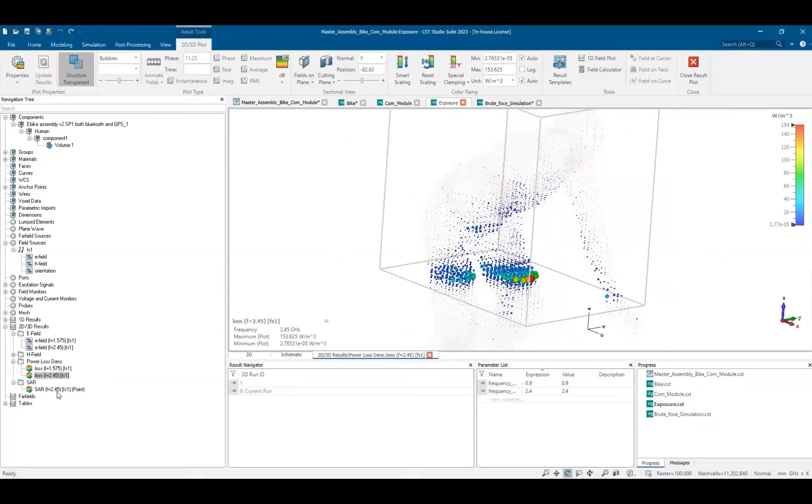And now we can even observe the SAR, which is our final KPI. SAR stands for specific absorption rate, and if I click on it, it's evaluated in watts per kilogram. Basically, it gives us an idea about the amount of power that is absorbed by 1 kilogram of our human tissue.

So again, we can see here that the maximum is at the legs, probably. And the maximum of the SAR that we have is 0.13, more or less. So this is something completely fine.

First of all, the Bluetooth antenna is a low power device, so we do not inject watts and watts in there — maybe hundreds of milliwatts at most. So we do not have a lot of power radiated, which is why the power absorbed by the human body is very low.

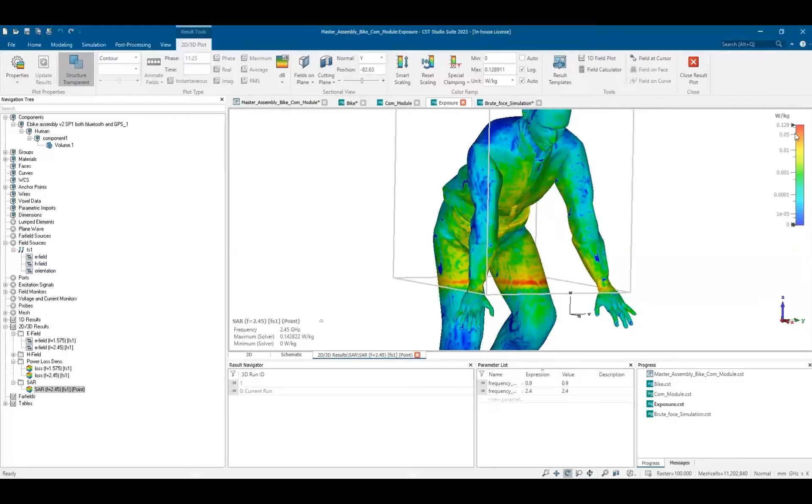Just to give you some information, the international standards have fixed those limitations, only on the region of the head. The standard says the SAR shouldn't be higher than 2 watts per kilogram. On the torso and the limbs, the hands and legs, the SAR shouldn't exceed 4 watts per kilogram. So here I'm at 0.13 at the maximum, which is way below the limitations fixed by the standards.

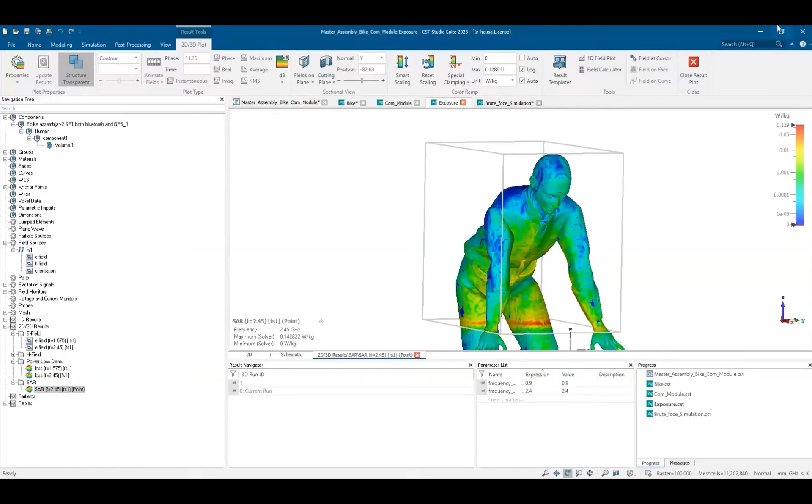So you can see here that our antenna is certified also from a human safety point of view. This is the end of my simulation. And of course, you can definitely see a cut view of the SAR because, okay, we have seen what's happening inside.

If you look at the brain, even though inside there's a region with a quite higher SAR than the dark blue one, it doesn't mean that all the high SAR will be located on the skin. The user should see what is happening inside the human body as well. This is why taking cut planes is also important.

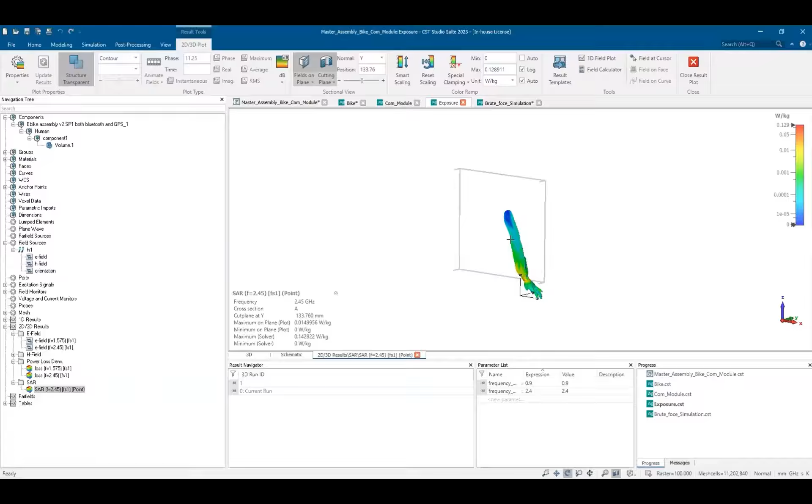So there you go, this is all I wanted to show you today. I hope this captured your attention, because it's a very efficient way that allows running big scale simulation on a simple laptop. All the simulations I showed you today were done on my own laptop — I had no GPUs, and the full simulation took me about 1 hour and 15 minutes.

I can definitely see this here. If I go to the hybrid solver log file, you see my simulation started at 4:11 p.m. and it ended at 5:28 — so it took 1 hour and 15 minutes, that's it, with all the iterations, etc.

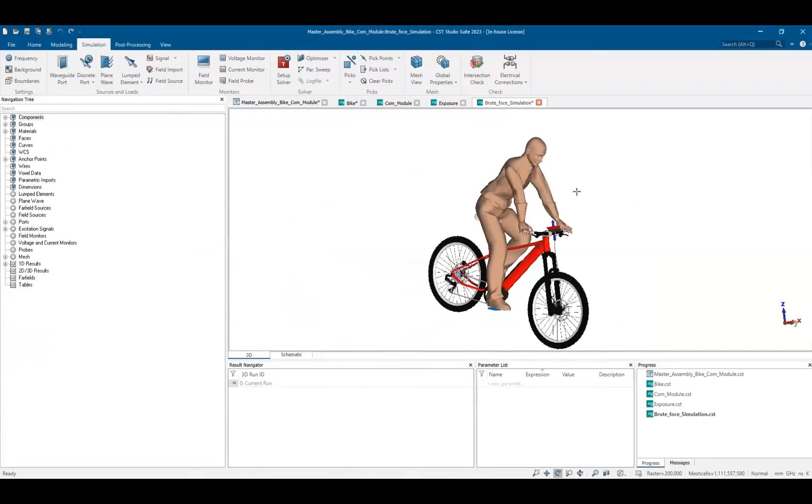If you would like to run the brute force simulation on my laptop, first of all, I cannot. But even if you run it on a cluster, it would take several hours to finish. So this hybridization helps reduce the simulation time, and it could be run on computers with lower performance.